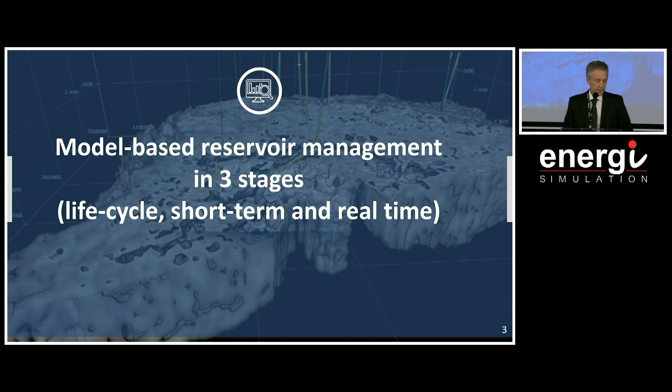Today I'm going to present part of the work we are doing, called model-based reservoir management in 3 stages. We are trying to divide the decision analysis into 3 steps and 3 stages: life cycle, short-term, and real-time. This challenge started about 3 years ago when companies in Brazil asked us if we could use these simulation models for short-term and real-time decisions.

They want to apply the decisions in digital fields. The other challenge was the pre-salt reservoirs—thank you, Leonardo, for the presentation about the situation in the pre-salt in Brazil. We have giant fields with a lot of oil to produce, but very complex carbonate reservoirs that take a long time to simulate. If we want to take good decisions, we need to do a lot of simulations, which is very time-consuming, so we are trying to make good decisions in less time.

So the objective here is to develop methodologies to improve the quality of short-term production forecasts and decisions. In order to do that, we are also trying to integrate machine learning and apply it to real-time decisions and digital fields. At the end, we want to contribute to efficient energy production.

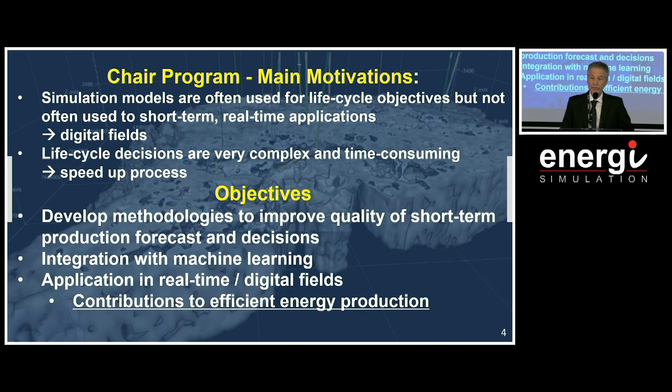I've been presenting this scheme for a few years now. I'm going to change the focus of the presentation a little. Here is what we do: we have the reservoir, and we divide this scheme by colors.

The green color is dedicated to building the models. First, we try to collect all the data we have, including uncertainties, to build what we call high-fidelity models. But high-fidelity models are very time-consuming, so we try to do simplifications into what we call fit-for-purpose models. We are now using multi-fidelity models because, depending on the objectives, we change the characteristics of the model.

Once we have these models, we go into the blue part with the life cycle decisions, which the reservoir engineers normally concentrate on—these are the decisions until the end of the reservoir's life. Once we implement a decision in the reservoir, we collect dynamic data like 4D seismic, well data, and so on, and we go into the red part, which is the history matching or data assimilation part, in order to reduce uncertainties and improve the quality of the models.

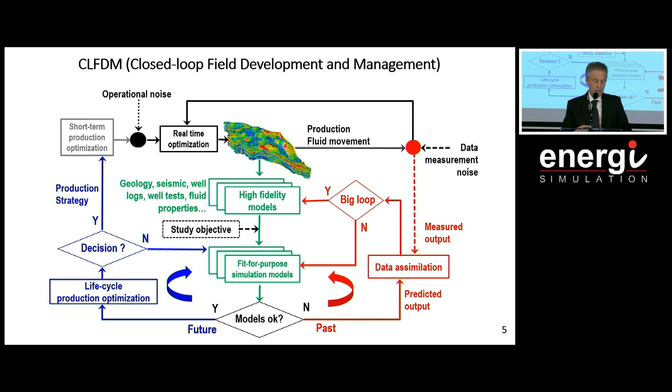Today I'm going to concentrate on the black part and the blue and black part here, which is the short-term decisions. I simplified the other parts here to show the 3 stages.

It's the same thing as with the models: we have high-fidelity models, then we simplify them to take decisions. The idea here is the same. We have the life cycle decisions, which are very complex. When we try to take these decisions as set points for short-term, shown here in gray, we move to short-term decisions. What we call short-term here is the size of the cycle of the closed loop. Once we have the decision for this short-term, we go to real-time. That's the whole idea.

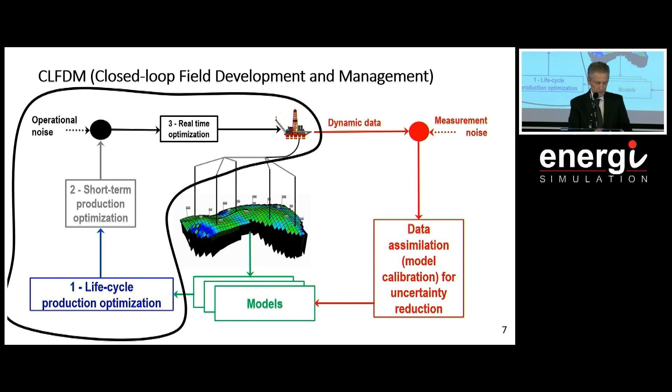In order to do that, we are following our 12 steps, which I have presented in previous years as well. We have the green steps to build the models, the red steps to reduce uncertainties and improve the quality of the models, and then the blue part, which is very complex, so we divide it into several stages.

We need first to set the production strategy for the base case. We perform a risk analysis. Then we select some representative models, which represent the scenarios and uncertainties we have. Then we find the best decisions for each scenario in step 9. In step 10, we find the robust decision, which would be the best decision considering all the uncertainties we have.

In step 11, we integrate with production facilities and take the life cycle decisions. We've been doing that for a few years now, but it takes a lot of time. I'm going to show today that we are trying to simplify this process and intensify the decisions in step 12, which is the short-term one.

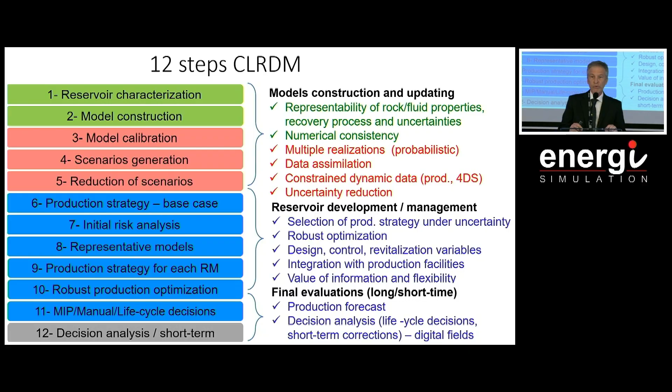So we also divide our variables into 3 groups. Group 1 are the design variables, for example the platform capacities, the well number, the well positions, and so on. Group 2 is how we control the wells and the system. Group 3 is the revitalization variables. For the pre-salt, these are very important because we have second waves and other waves, since we have limited gas production capacity in the platforms. So these revitalization variables are important in how we change the wells in the future.

The colors are the same here. We have the models in green. Then we take the life cycle decisions in blue, for group 1, group 2, and group 3. When we finish that, we have the set points for the short-term decisions, taken in gray and black. The whole idea is that instead of taking very complex decisions for all the variables until the end of the reservoir's life, we concentrate on the variables we're going to apply in the next loop. That's what we do in gray.

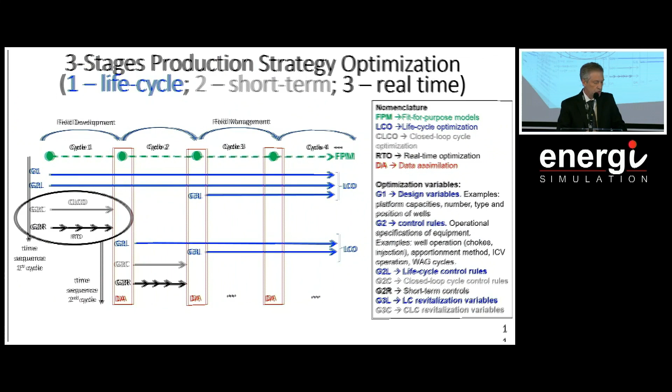So first we do this blue part. Instead of taking 5-6 months to do a very complex process and decisions, we do a very fast procedure. We take the best decision we can in the time we have, then we go to short term. We try to manage the field in the short term, and in parallel we keep running the other process, as I'm going to show here. So first the blue, then the gray. The idea is to divide this into three stages. We're going to present this at an SPE conference in the beginning of 2024.

First, the life cycle decisions. We have to include all the uncertainties, perform risk analysis, probabilistic decisions, and so on. For the pre-salt, we need hours to run each model, so it takes months to make all the decisions we can. So what we're trying to do is get approximate solutions with lower fidelity models and lower fidelity processes, and use this as set points for the closed loop decisions.

The second stage is the closed loop decisions. We concentrate only on the variables we're going to apply in the next weeks or months, for example. Then we take the decisions, and we've also shown that to do that we don't have to use very probabilistic analysis, because the models don't change too much in the near future, so we can do deterministic analysis. Once we finish the decisions, we check the effects on the life cycle, and then we go to the third stage, which is real-time optimization and implementation, similar to a digital twin.

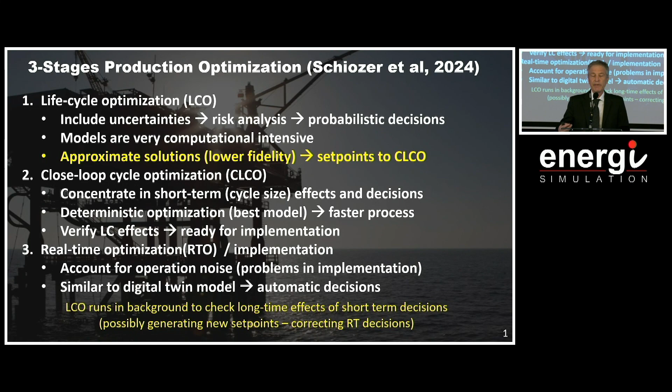This real-time stage is important because we have a lot of operational problems that can occur in the short term. In parallel, we can run the life cycle decisions in background. If something changes, we can go back and start the process again. So this is the scheme, I hope it's possible to understand.

We have stage 1, group 1, group 2, and group 3 variables, set points for group 2, stage 2, then we take the decisions for the short term. In parallel, we can run stage 1 in background. So while we're implementing the decisions, we can keep running the process in the life cycle. If a decision changed, I can start again the next cycle, and so on. And if we have any operational problem, any failure in wells, for example, or any problems reinjecting CO2 into the reservoir, I can go into the real-time decisions.

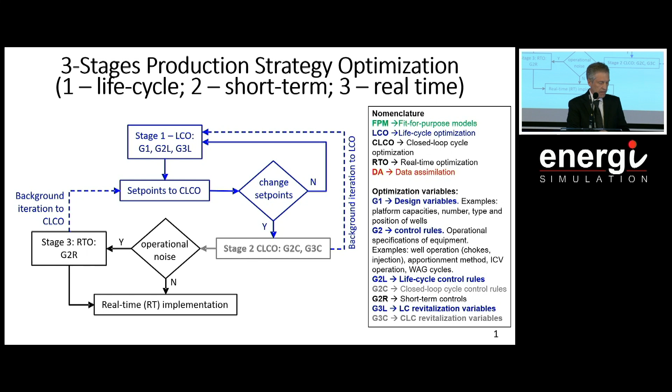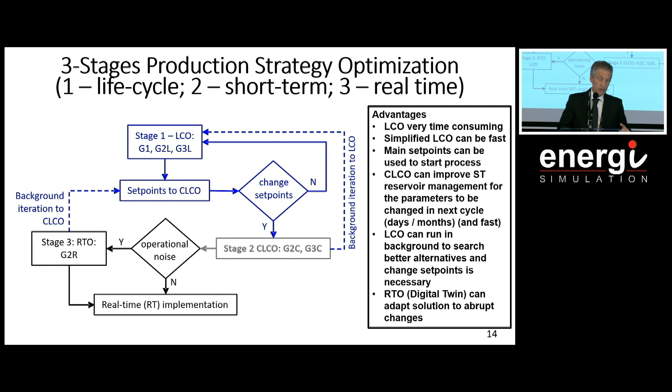So the advantage of doing that is that life cycle decisions are very time-consuming, so we can simplify the process and do it very fast with closed-loop cycle optimization. Then we can implement them very fast in the reservoir. We can run the life cycle optimization in parallel, and if something happens we can change the decisions. If we have operational problems, we can go and change the decisions instantaneously in the reservoir. We're trying to develop a concept similar to a digital twin here.

In order to do that, 3 years ago, it looks easy, but we had a lot of problems to implement these things. The first thing we realized is that the current models we use are not good for short term. They are good for life cycle, but not good for short term.

So we had to improve the quality of the models, especially for the short-term forecast. Then we had a lot of problems understanding how the boundary conditions, which come from the integration of the production facilities, will affect the problems. So we first had to integrate with the production systems. Then we had to develop the concept of human intervention free, which is the boundary conditions. Of course, if someone goes there and closes a valve, things will change, so we have to react to that.

We implemented the conditions of prescribed operation. There was a suggestion from last year's summit. The prescribed operations are everything that we can set up from the beginning - for example, the size of the cycles for the injection, everything that we know is going to happen in the future. In steps 3, 4, and 5 here, we are trying to integrate with machine learning.

We didn't get good results in the beginning, so we are now trying to use some physics-based machine learning, filtering the machine learning forecasts based on the restrictions we have from the system, and also using hybrid approaches - data-driven helping the models, and probabilistic model-based helping data-driven - to get good results.

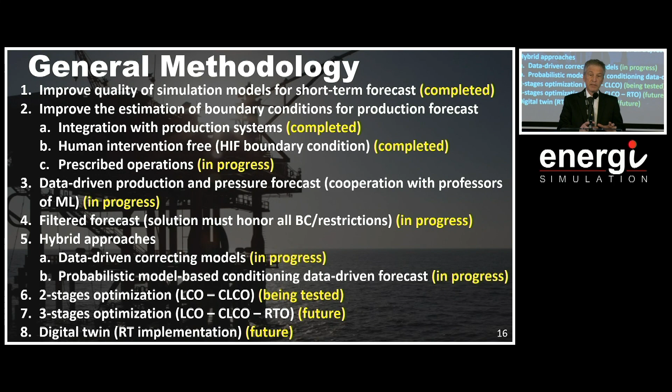So in this methodology, first I'm going to show an example. Here's a probabilistic analysis of a benchmark that we have from the pre-salts. As we go from the history to the forecasts, we can see that all the models are history matched in the past, but when you change to forecast conditions, the productivity and injectivity of the wells have to be very well calibrated, and it's not very easy to do it probabilistically because we have several models to do it.

But the effect of that on life cycle is not so important, while the effect in the short term is very important. As you can see here, we can have 50% errors in the rates and so on. So we had to calibrate very well the productivity and injectivity of the wells.

At the bottom, we can see that as we do that, we go from this indicator that we call NQDS, which is the quality of the history match. In the green parts, for the life cycle it was okay - between 5 and -5 was okay because the behavior was fine. But for the short term, the errors were very big.

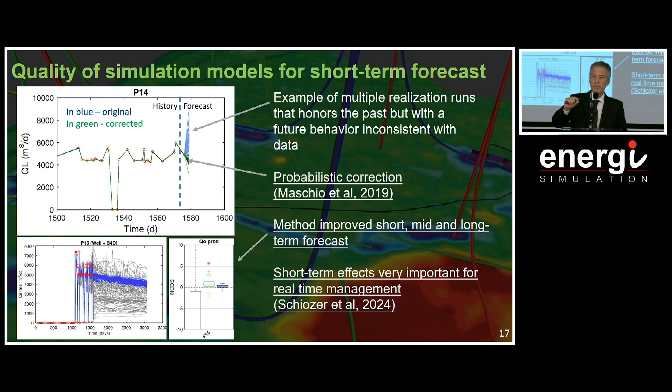So we had to develop a way to calibrate this productivity for each of the models we are going to use for the forecast. And then we have the blue results there, which are much closer to 0. That means the models are much better for short-term forecast.

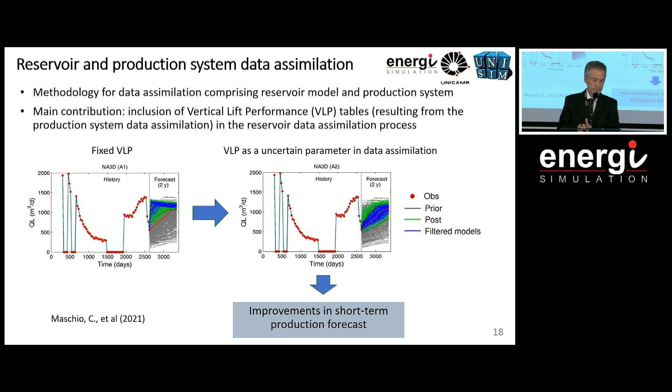We also had problems integrating with production facilities because we have models that try to model the surface facilities, and they are also wrong. So we have to calibrate these models using past data to calibrate how the pressure drop in the well behaves and so on. Here I'm showing an example of how we can improve the quality of that, which is also very important for us to get short-term forecasts good for short-term decisions.

Finally, I'm going to present here the 3-stage optimization based on this benchmark model called UNISIM-IV-2026, which is a pre-salt reservoir. The complete procedure to optimize this using the 12 steps would take us about 6 months to run because we have a lot of models, 9 representative models. Every time we do a robust optimization, we have to run 100 iterations and 30 years of simulation time and so on.

So we simplified the process a lot, using just 3 representative models. Instead of running 30 years, we ran 20 or 22 years just to get an idea of how the strategy performed - we didn't need to run the full simulation time. We reduced the number of samples to optimize and so on. With these simplifications, instead of running 6 months, we could run the optimization in a week, for example.

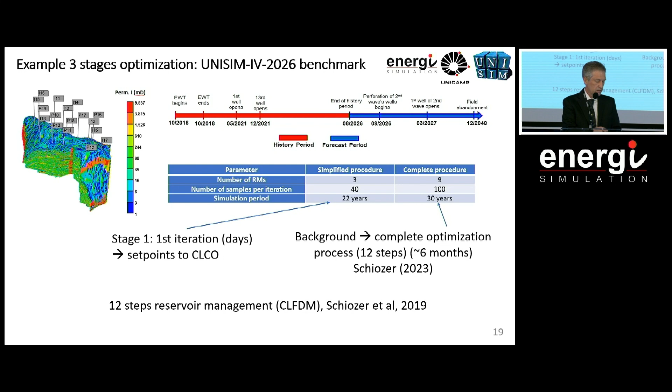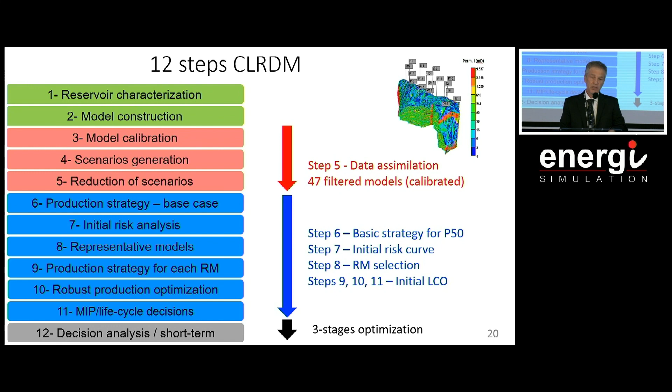And we are using this as a base, or set points, for the operation for the next months. So we perform the entire 12 steps: build the models, then the data assimilation process with 47 filtered models, then the basic strategy for the P50, initial risk curve, the selection of representative scenarios, and then perform the optimization. Once we finish this optimization, we are implementing the 3-stage optimization process.

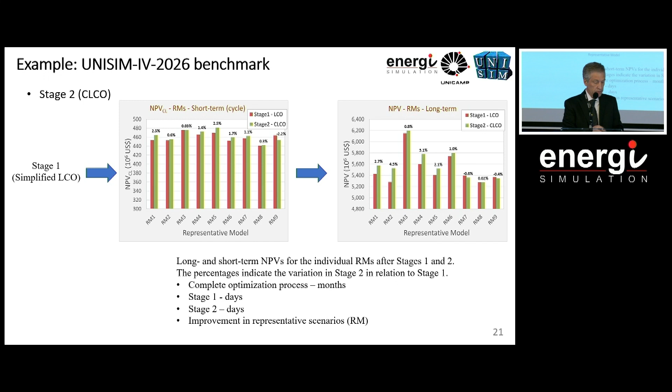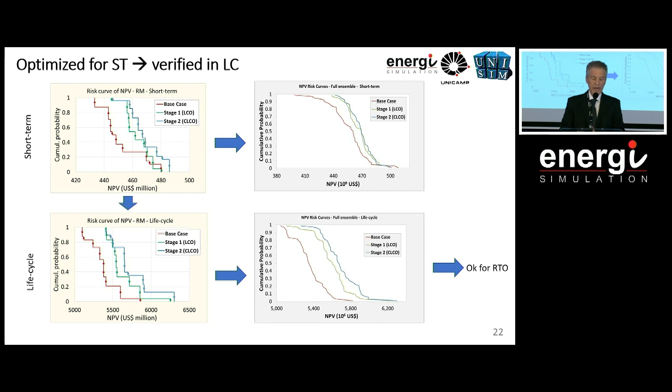Once we finish that, we go to real time, which means we have to react to all these problems that occur in real life. Wells having problems, and sometimes we don't have enough wells to reinject all the gas and so on. So we have to do this optimization in short term.

Here's just an example, but we have published other examples as well. First we have to decide if the well is operating in full potential or restricted. Then we have to implement the prescribed operations, for example, the cycles, how much gas and water we're going to inject, what are the conditions for the producers and injectors, and so on.

And every time we have an operational problem, we go there and correct it, improving the quality of the results. An example of that is sometimes for the life cycle, we think the models can reinject all the CO2 back to the reservoir, but in real life, when we get there, we don't have enough wells to put this in the reservoir, so we have to change the conditions and operations in short term.

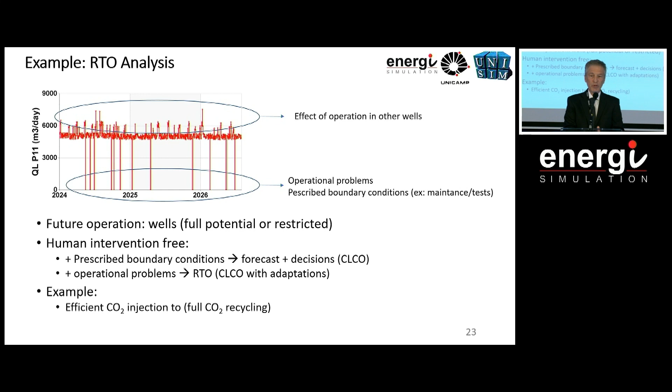So in a way, we divide this process into these 3 stages, and that allows us to operate the wells much better than we used to when thinking only in a life cycle.

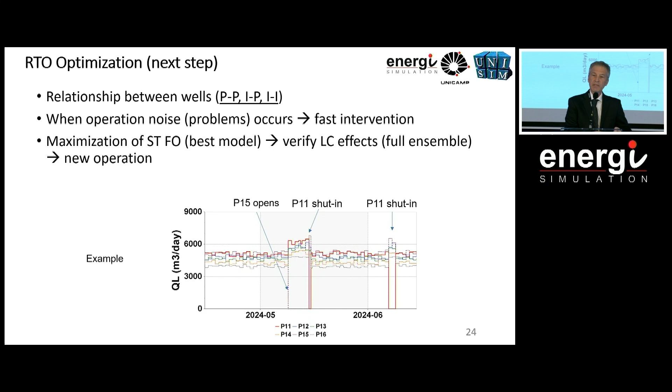And what we are implementing right now is like a digital twin model where we have the relationship between producers and injectors. And once we have a problem, for example, in one well, as we show here in the example in P11, we know what to do with the other wells and with the injectors immediately. With this, we can optimize immediately the operation of the field.

So as a summary, we completed this optimization process that would take us 6 months. Would take us 6 months to do it. We did it in a few weeks. And then in parallel, we keep running the optimization for the full field. But we already have an operation that we can optimize in the closed loop.

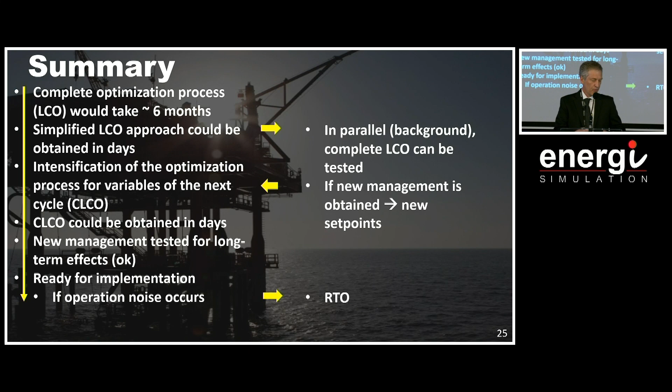In our case, the closed loop is 6 months. So we have the operation for the next 6 months. And then this is the implementation. We idealize for the field, but if you have problems, we go there and correct in the short term. So we can do the 3 processes in parallel, and we hope this will improve the quality of the solutions for the management of the pre-salt fields.

So finishing all this, we are trying to improve the quality of the management for the pre-salt fields. There are giant fields with permanent 4D, intelligent completions, WAG cycles, WAG CO2 injection, and so on. So it's a very complex problem. Instead of taking 6-7 months to make a decision, we can do it in a few days.

We are applying, we improved as well the green part there, because instead of running one model only, we have a multi-fidelity model. Each model has a different fidelity for each type of decision that we are taking. We have improved the history matching and data assimilation part, especially for the short term, and especially for the integration with the production facilities. Normally, reservoir engineers don't do it very much, but the boundary conditions for the reservoir are very important for us to predict how much we're going to produce in the next days.

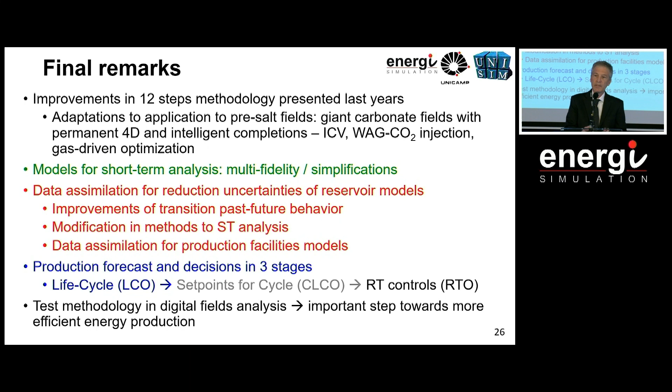We have divided this decision process into 3 stages, trying to do the same thing that we do for models. For models, we first have high fidelity models, then we simplify the models to simulate them in time. The decisions are the same. First, we have these life cycle decisions that are complex, but they can be simplified to short-term analysis. That's the same idea. And this is the final step we are taking to build a digital twin and digital field management for the reservoir.